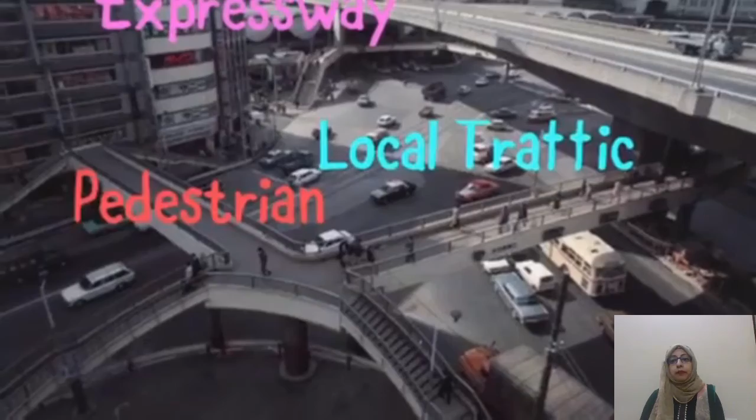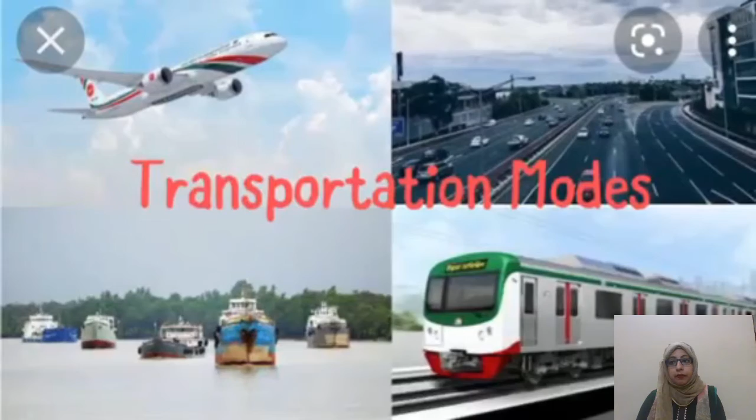Can anyone guess what is the topic? Of today?

Yes, the topic is transportation engineering. I think it is a very popular topic to all of us, but we don't know it from the engineering point of view. So today I will try to learn something about it from the engineering point of view.

Let's start. These are the contents of my topic: firstly, the definition, then objectives, and then traffic engineering tools. Now, what is transportation engineering?

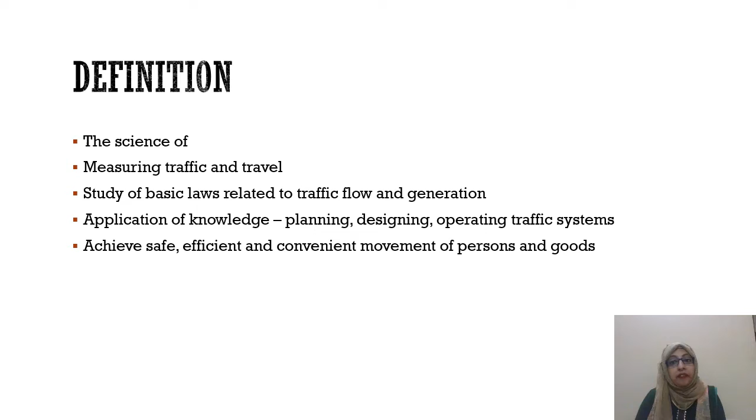As a normal person, I can say that transportation means traffic or travel or anything like that. But from the engineering point of view, it is the science of measuring traffic and travel, study of basic laws related to traffic flow and generation, and application of this knowledge to planning, designing, and operating traffic systems to achieve a safe, efficient, and convenient movement of persons and goods, not only traffic.

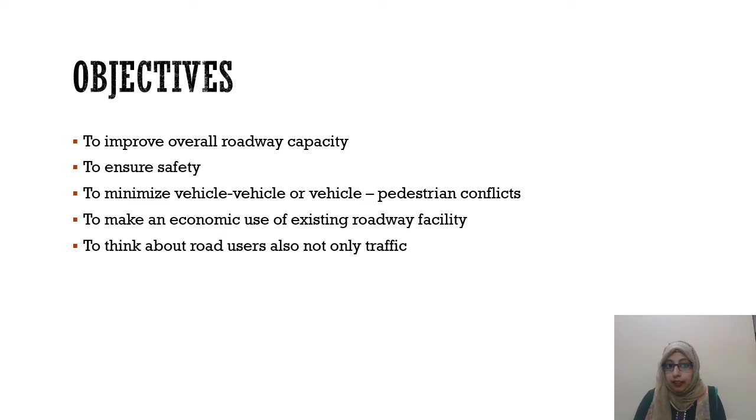So the objectives are to improve the overall roadway capacity and to ensure safety. This is the point I want to highlight. As engineers, we must consider the safety of the laborers, pedestrians, drivers, or road users.

But as I'm a normal person, we don't think about safety. We have to minimize vehicle-vehicle or vehicle-pedestrian conflict, and then make economic use of the existing roadway facilities, and think about the road users also, not only the traffic.

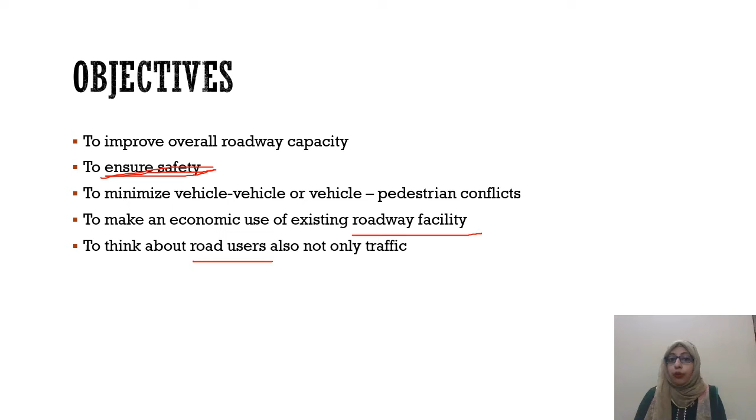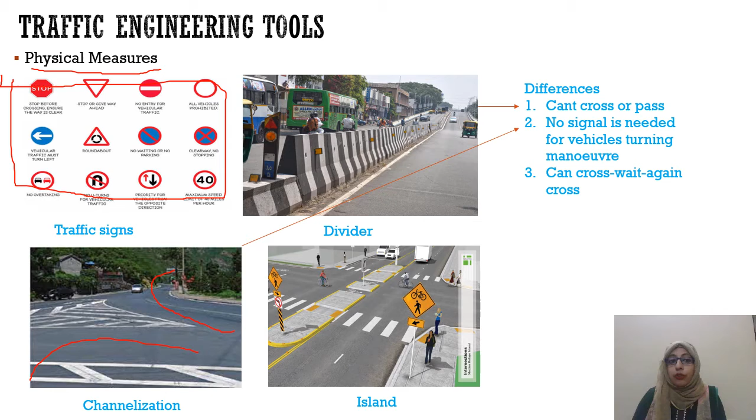But in the third case, this is the island, which gives space for people to wait. People can cross, wait here, look around, and then cross the next path. So these three items have major differences.

But as normal public, we don't know about these things. Everybody calls these dividers, but no, there is a big difference between these three.

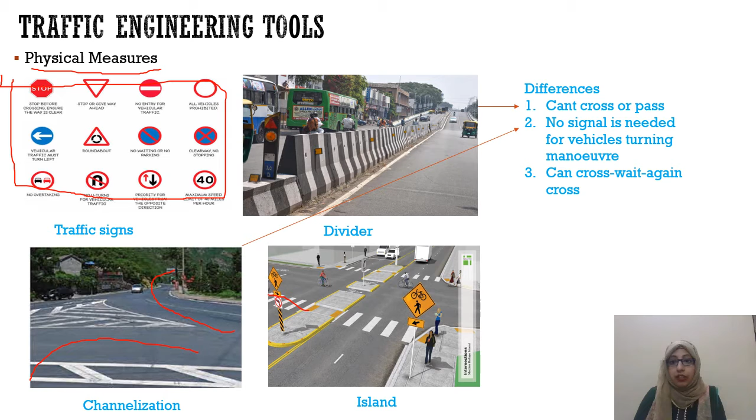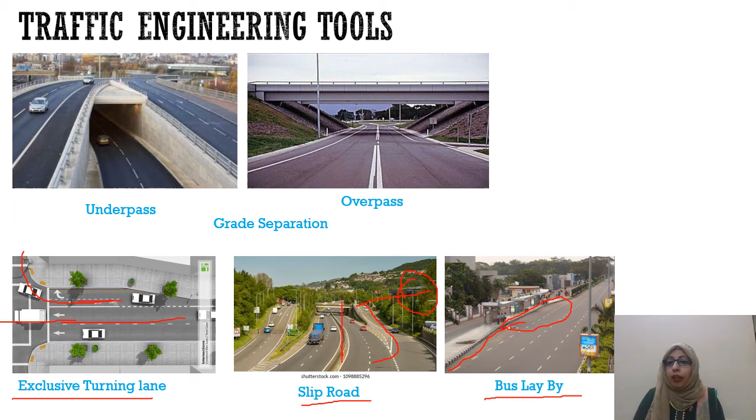Now this is another term, bus lay-by. What is bus lay-by? We all know about the bus stop, right? This picture shows the bus lay-by, and another name is bus stop. The bus will come here and stop, and passengers will ride the bus. But the engineering term is bus lay-by.

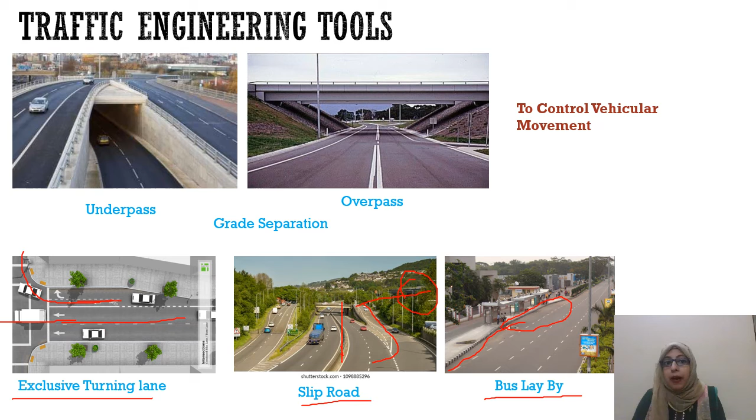All of these pictures or tools are used to control vehicular movement, but they cannot control pedestrian or other movement. So to control the other movements, there are some other tools like on-street parking, off-street parking, loading or unloading freight vehicles, etc. Now, what is on-street parking?

On-street parking is the parking where the car can park on the road, but not on the main lane. They can park on the curb side of the road. In case of off-street parking, there is a space occupied by a building, an apartment, or a business administration where people can park their car for a long time without interrupting the main road or the main traffic.

And loading or unloading vehicles, this is also very familiar in our country, but there is no system for them. In other countries there is a system. They can park their car for a little time, which will be given by the authority as a sign on the road, and loading or unloading time will be fixed for them, so there will be no conflict between pedestrians or other road users and the loading vehicles.

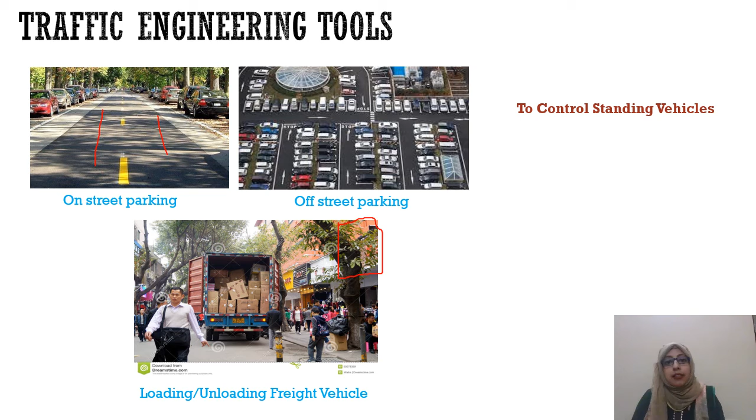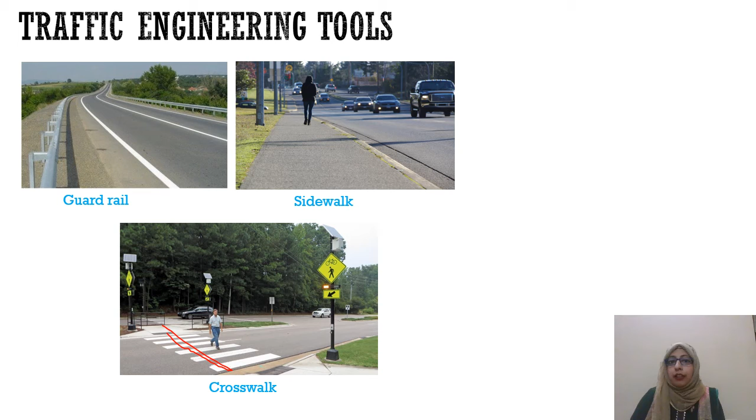And this is the crosswalk, which is very familiar to us. And this is the sidewalk, also called the footpath, which is used only for pedestrians and cyclists.

These tools are used to control pedestrian movement. So from these pictures, we can know which tools are used for vehicular control and which tools are used for pedestrian control, etc.

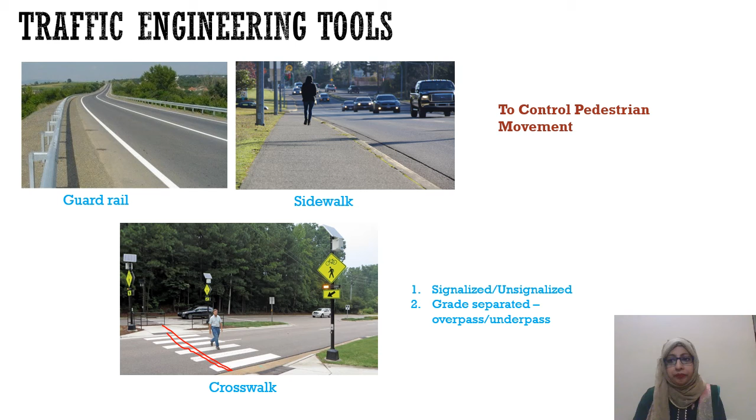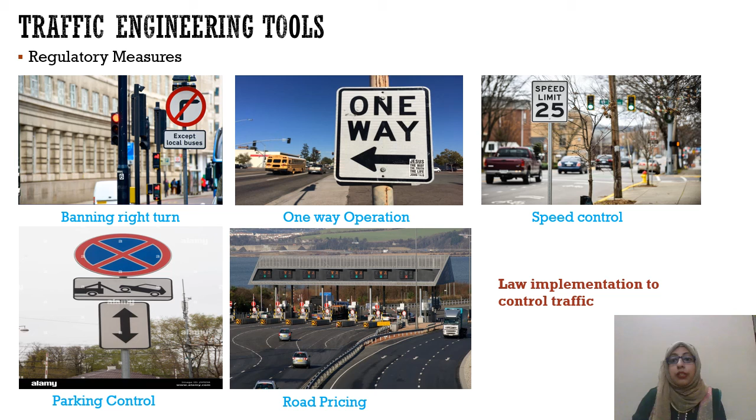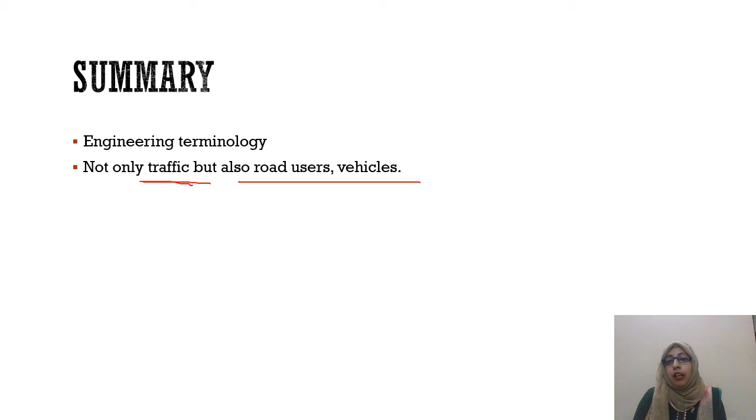In summary, from this topic we learn about the engineering terminology of some general terms, and we must also think about traffic as an engineer, not only the traffic, but also the road users and vehicles. I hope this video will help you understand the simple terms in transportation engineering very easily and clearly. Thanks to all for watching this video.